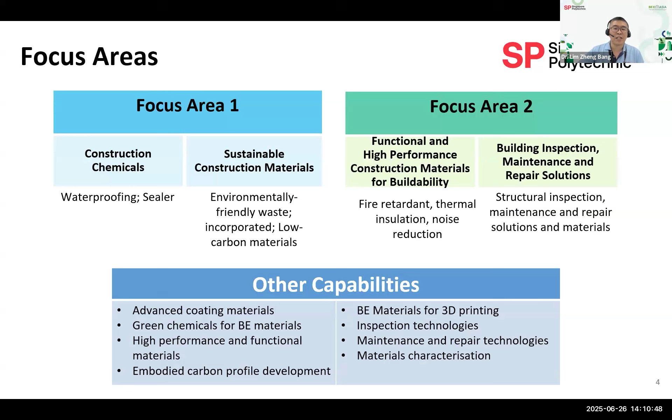Now, how do we engage with industry? There are different modes of engaging. For example, it's very easy to come out with some preliminary proof of concept studies, and then we scope our understanding of your problem statement, scope the work, and achieve the delivery milestones. SP can also assist the company to get funding from government.

Therefore, we move on to number 4, and do a lot of R&D, focusing more on downstream applied R&D, before we can transfer and commercialize to industry for use. Last but not least, this might involve some quick trial runs to test out existing technology and do a comparison study to conventional solutions as well.

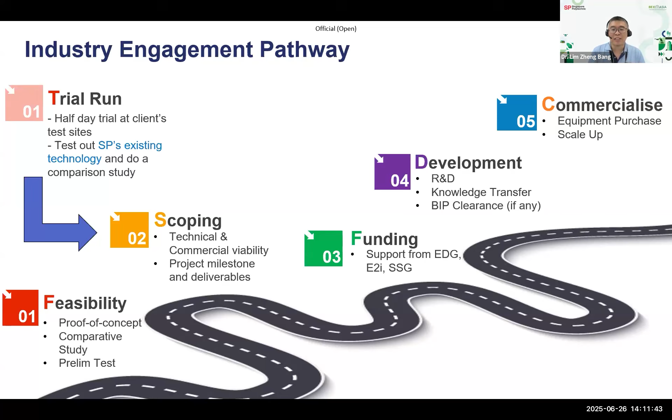This is how we engage industry, hoping more and more companies, local and overseas, come to work with us to try out their problem statements as well. Now, just to share some background about the centers.

I'll show you some examples of how we can use construction chemicals to achieve sustainability. For example, using bituminous coating, which is room temperature bituminous coating for waterproofing. Currently, contractors have to melt the bitumen at very high temperatures using a welding torch and LPG gas before laying the waterproofing membrane at the rooftop. This process involves a lot of harmful VOCs, smoke, and smell.

There might be alternative products available overseas, but they're expensive. Therefore, SP came out with a flowable, room temperature, fast-drying coating solution, like a glue, that can be applied at room temperature without the use of a primer. This is compatible with the lowest grade of bitumen, keeping the solution affordable, while still fulfilling the local standard to meet required performance.

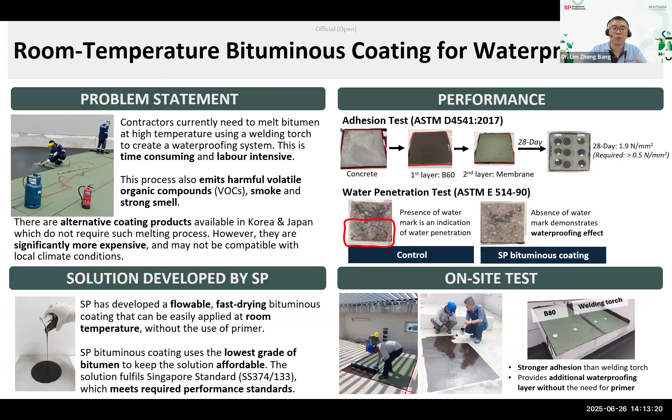We've done a lot of serious, critical testing, and worked with the company to do a trial run, proving it has stronger adhesion than the conventional welding torch method, and provides additional waterproofing layers without needing a primer. This overall process helps the industry become more sustainable, being worker-friendly and environment-friendly since we no longer need the high-temperature process.

The second example: conventional contractors have to use mechanical grinding to roughen the surface before laying epoxy coating on a tile surface. However, this process is very dusty, not environment-friendly, and noisy, raising concerns for homeowners and regulators. So we came out with a more sustainable solution to tackle this whole process.

You just apply a cream over the tile surface for about 1 hour, and it provides a uniform, scratch-free surface. This is homogeneous regardless of worker skill, compared to the conventional process. As you can see, the performance shows better adhesion, and the bonding is strong, whether in dry or wet conditions, with improved skid resistance.

We've already tried this with an industry collaborator and achieved the roughening within 1 hour with improved skid resistance and adhesion to epoxy. We're definitely looking for more companies to work with to trial further and commercialize the solution.

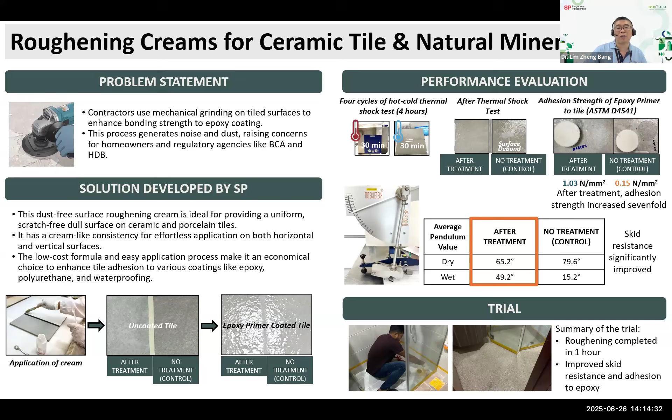Wood material is also one of the materials we've used. Conventionally, material suppliers use CCA, chromated copper arsenic, to protect wood from termites. This is not sustainable; in fact, CCA is carcinogenic and already banned in the US. So how can we help the local industry come out with a CCA alternative?

At SP, we came out with different formulations applicable to outdoor wood, in this case Malaysian Chengal, to protect against termites. We incorporate the CCA alternative inside the varnish, or even as a standalone liquid solution, to treat the termite-affected woods. We improved the formulation by changing different effective ingredients so it can withstand the Singapore environment conditions like UV and humidity.

Conventionally, the CCA process, as you can see from the picture on the right-hand side, requires impregnation at very high pressure, which might not be suitable for a multi-story building. Therefore, I think this process can also help redesign the whole process the industry is using to be more sustainable.

So we conducted a trial run over 2 months outdoors, and it's proven effective for termite prevention. We have commercialized it to local companies, and we're looking for more companies to do a trial and adoption as well.

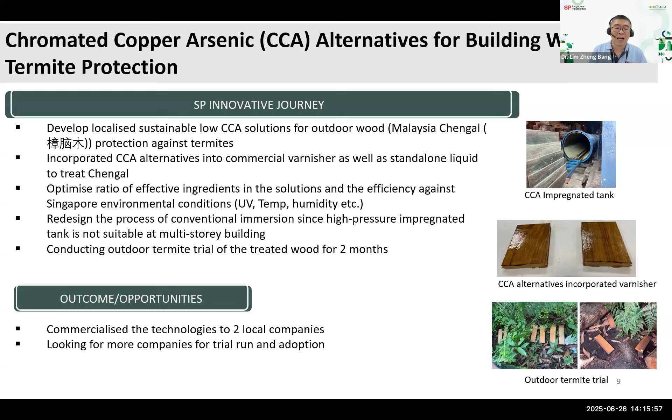The last of the chemicals we're covering regarding sustainability is the nanoglass coating for heat blocking. As you're aware, Singapore has a very hot environment, and this coating can be applied on the interior glass surface, which prevents solar heat from entering the buildings. Based on the results, internal reflection can reduce temperature by close to 10 degrees Celsius, and it can be applied to different shapes or profiles of glass. It's also very thin, about 50 microns.

We have proven this through a study together with BCA Skylab, and it can reduce thermal energy consumption by overall 9%, and achieve other functions like a 33% reduction in daylight glare. So I think this is also one of the technologies we're thinking to promote to the local industry for use in buildings. As you can see from the picture, it's very transparent. On the left is without the coating, and the right-hand side at BCA Skylab is with the coating. Achieving this result raises our confidence in bringing this technology to the market.

So I've covered some projects in terms of sustainability using chemicals as an angle. Next, I'll cover projects using materials, especially waste and low carbon materials that we try to achieve. The first project uses processed plastic waste in asphalt for better durability.

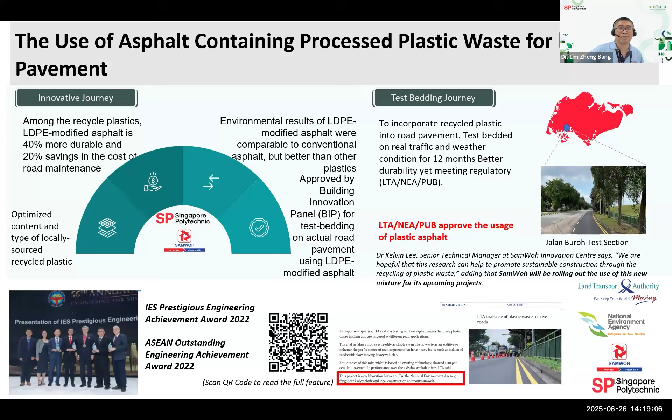The second example uses graphite, which, as you know, comes from lithium batteries. After the battery is recycled, the graphite becomes waste already. Instead of burning it and dumping it into a landfill, we try to repurpose it, giving a second life to this spent graphite. Our objective is to cut down the reliance on traditional cement, which Singapore has to import, contributing to carbon emissions.

So we try to use spent graphite as a cement alternative by implementing a very good, efficient pre-treatment method to purify these raw materials. Then we optimize and design this called blended mix and trial it. As you can see, the achievement is on par with the conventional cement mix, and it's in compliance with the US EPA 1311 TCLP level.

We also conducted external testing at the industry side, which showed that it has a very low water absorption value and a very smooth finish as well. I think this is very easy to conduct compared to conventional cement mix, and it gives us less crack formation as well.

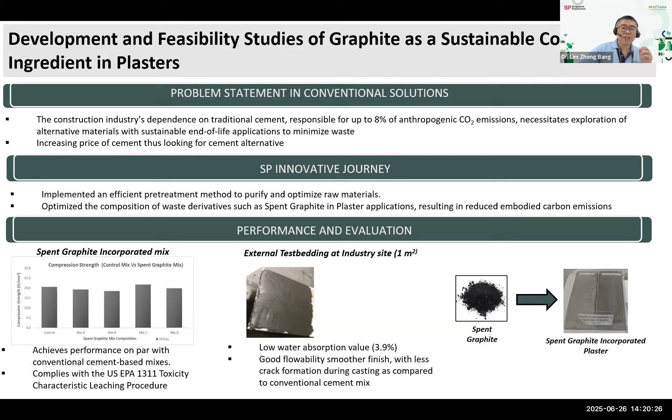Now, similar logic, but instead of spent graphite, we're using biochar. It's not new, biochar has been heavily used in agriculture applications. However, we try to transfer it to use as a cement substitution in mortar, optimizing the whole cement matrix. As you can see, the overall physical properties of the biochar are compatible with the control mix, and we think it can be used with improvement of performance as well.

Chemical leaching is also fulfilled. Some results show that the biochar derivative cement is able to absorb more CO2 compared to control. This potentially not only cuts down carbon emissions for the whole material, but also becomes a carbon sequestration property. This project was also interviewed and voted on by Zaobao.

We have already conducted and completed all the lab work and accreditation testing, and we're currently in the process of commercializing our biochar mortar formulation to collaborators. We want to expand the scope of the work, not just mortar but maybe concrete as well, and we welcome RMC, precast, or end users to think about how to work with us to trial together.

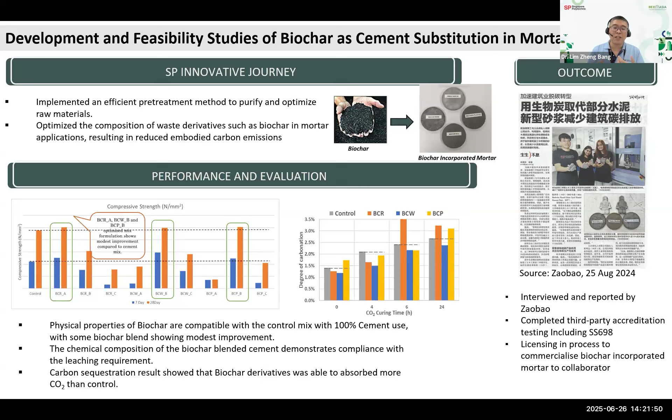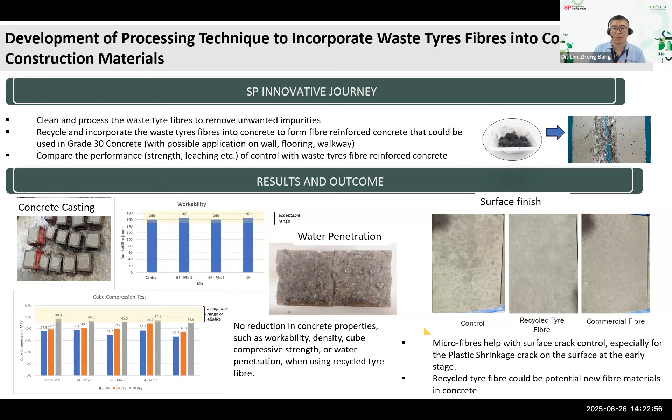I've just finished all these introductions of the projects. I'd really appreciate if you have more time and are interested, we can connect and reach out to do more collaboration on projects, and I'll share our website with you. You can scan even the LinkedIn for the latest news and updates on our progress as well. In this case, I will wrap up my introduction.

Thank you. Thank you, Dr. Lim, that was interesting, especially the tires one. I was reading that Kuwait has one of the largest tire graveyards in the world, so maybe that's really ready feedstock for that. Now maybe I invite the next one, Dr. Li, to share with us his presentation. And thank you to Dr. Lim.

Okay, good afternoon everyone. I'm Xiao Dong, manager of the COI BEAM. It is my pleasure to present our projects to you. Following Dr. Lim's introduction, I'll be sharing three additional projects related to sustainable functional construction materials.

So first, industrial ashes and waste glass are turned into silica aerogel, which is a lightweight material with thermal and acoustic insulation properties. Second, glass recovered from end-of-life photovoltaic modules or solar panels is converted into foam glass insulation panels. And finally, waste autoclaved aerated concrete is upcycled into supplementary cementitious material.

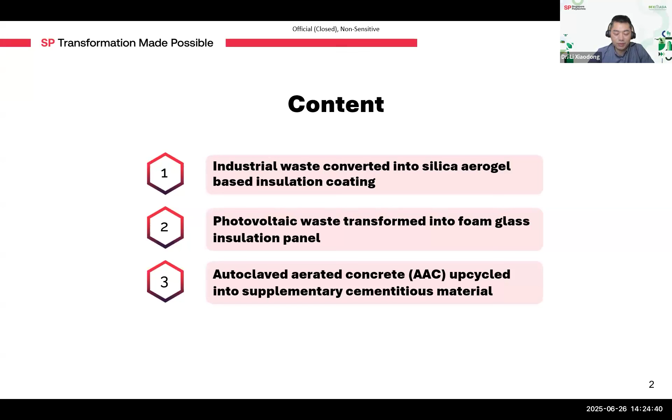So let me begin with our first project, which focuses on an exciting transformation, turning industrial waste into high-performance insulation coatings made with aerogel.

As urbanization and industrial activity accelerate globally, the volume of solid waste is rising rapidly. One major response to this has been the growth of waste-to-energy incineration, a process that not only helps manage waste but also generates electricity. Reflecting this trend, the global incinerator market grew from around 18 billion US dollars in 2023 and is projected to reach 23 billion US dollars by 2033. But this comes at a cost - incineration produces a large volume of ash as a byproduct.

While some of the ash is relatively safer and easier to recycle or landfill, a large portion of the ash poses a greater challenge. It contains higher concentrations of heavy metals, salts, and other contaminants, requiring special handling and treatment. This presents an urgent need for green, sustainable technologies that can manage these byproducts in a way that is both safe and value-adding.

In Singapore, waste management is a national priority. The government aims to reduce the amount of waste sent to Semakau landfill by 30% by 2030 as part of its zero waste master plan. In 2023, Singapore still generated about 6.86 million tons of solid waste, a slight decline compared to previous years, but still a significant volume.

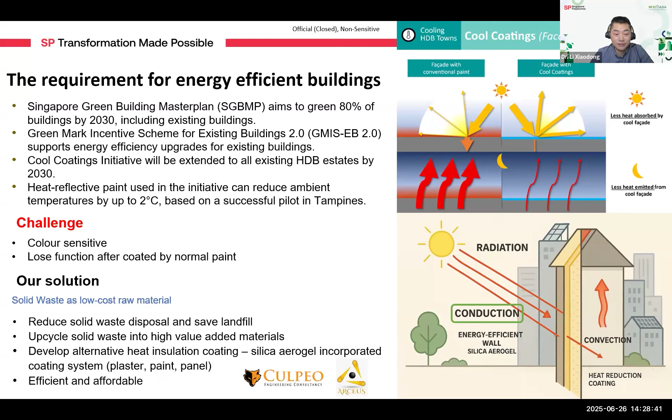With support from the Urban Solutions and Sustainability Innovation and Enterprise Office, we successfully licensed this technology to Culpeo and spun off a company called Arceus Resources to scale the silica aerogel production. Silica aerogel is a remarkable material known for its ultra-low thermal conductivity, lightweight structure, and excellent fire and sound resistance. It's widely used in high-tech sectors like oil and gas, aerospace, and military insulation systems.

But there is a problem: it's traditionally too expensive for widespread use in the building industry. So we tackled this challenge head-on by using waste material as raw feedstock, including different kinds of ashes such as wood chip ash, coal ash, municipal waste ash, and waste glass, and optimizing the manufacturing process to reduce energy consumption and improve yield. As a result, we reduced the production cost by up to 50%.

We achieved a thermal conductivity as low as 0.02 watt per meter Kelvin, a level comparable with top-tier insulation materials, and produced aerogel with a density as low as 0.05 kilogram per liter, making it one of the lightest insulation materials available. My colleague Dr. Han will introduce more details later.

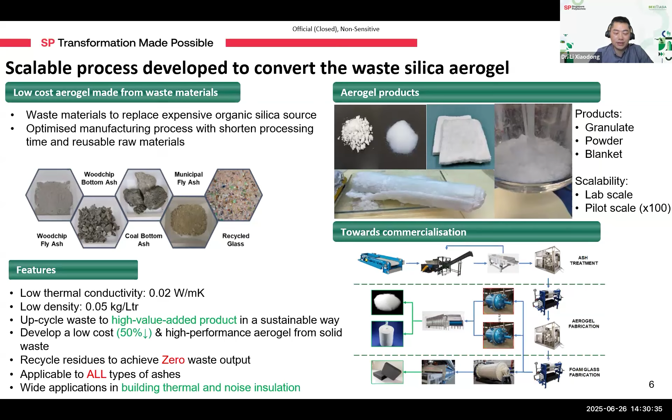Our aerogel can be processed into multiple formats: blankets for building envelope insulation, and granulates or powders used as additives for different coatings. We have proven scalability by moving from beaker-scale laboratory synthesis to about a 10-liter pilot batch process, achieving a 100-fold scale up, which paves the way for full-scale industry production. We also designed the full industry production line.

So how does it perform? In one simulation test, we coated a hollow concrete box with the aerogel-infused coating, placed it in a 40°C oven, and used thermocouples to monitor the temperature through the material. With about 20% aerogel content, we observed a temperature drop of 3.3°C, a significant boost in insulation performance. Aerogel's high porosity also makes it a natural sound insulator, with sound reduction of 19.6 decibels, ideal for noisy urban environments.

Beyond the lab, we have also demonstrated its effectiveness in a real-world setting. At the SP Graduate Guild building, we recorded a surface temperature reduction of up to 15 degrees Celsius after applying our aerogel-based coating. Please note this refers to the surface of the coating, not the indoor air temperature, but it clearly illustrates the material's heat blocking capabilities.

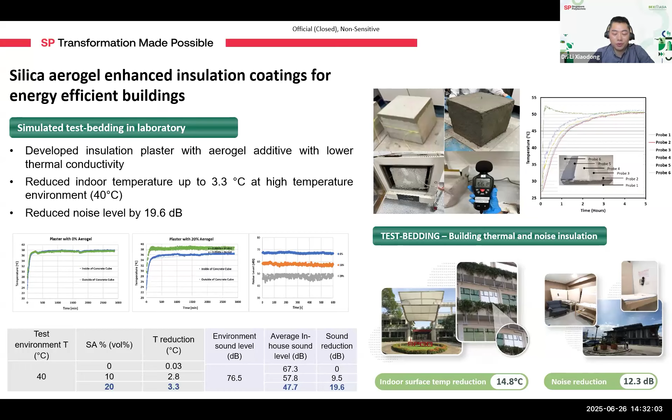And at the JTC Jurong Innovation District Gallery, we achieved a sound reduction of up to 12 decibels. So through this project, we have shown how an industry byproduct, incineration ash, can be turned into a game-changing building material.

Our second project focused on transforming solar panel waste, specifically the waste glass, into high-performance foam glass insulation panels. Solar energy is one of the cleanest and most sustainable energy sources globally, and over the years solar panel installations have grown rapidly. By the end of this year, the global installed capacity is expected to reach 2 terawatts. This is great news for clean energy, but it also brings a growing challenge.

What do we do with all the end-of-life solar panels? Solar panels typically last 20 to 25 years, and after that they need to be retired or replaced. In Singapore, we expect to generate around 5,000 tons of PV waste, mostly due to early upgrades at only half of their lifetime for better performance and profitability.

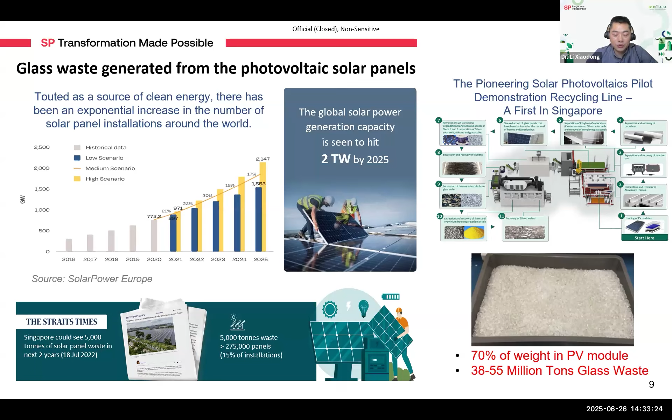To tackle this, we have developed the country's first PV recycling plant. But here's the issue: glass makes up about 70% of a solar panel's weight, translating to about 38 to 55 million tons of glass that need to be safely managed. Looking at the element content of the PV glass, which like other glass primarily consists of silicon and calcium, with additional metals such as chromium and titanium, it is important to find a safe recycling solution for it.

Our solution is to transform the glass waste into a foam glass panel, a lightweight, porous, and robust material with excellent thermal insulation properties. We have successfully converted the waste glass into foam glass and focused on optimizing its performance.

The insulation quality of the foam glass depends heavily on its composition and processing conditions. We tested different foam agents and carefully tuned the manufacturing parameters. The key evaluation factors are pore structure and size, pore uniformity, and material density. Too small pores don't insulate well, and too large pores weaken the structure. Uniform pores are ideal for strength and performance.

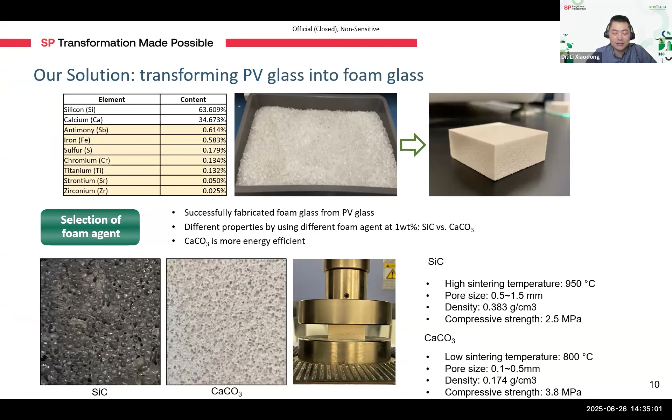For example, when using silicon carbide as the foam agent, we observed large and uneven pores, making the foam glass brittle. On the other hand, calcium carbonate produced uniform pores and stronger samples. Plus, it requires 150 degrees Celsius less energy during processing, making it a greener choice.

We further optimized the percentage of calcium carbonate. We found that increasing the content enlarged the pores and reduced the density, but it also weakened the structure. So we identified 1% calcium carbonate as striking the best balance between insulation performance and mechanical integrity.

The mixing time also plays a crucial role. Longer mixing leads to better powder dispersion. Our results show that after 6 hours, the density stabilizes, indicating optimal uniformity.

One drawback of the low-density foam glass is reduced compressive strength. To tackle this, we introduced fly ash into the formulation, not only to improve the strength, but also as another opportunity to recycle industrial byproducts and reduce waste.

The outcomes were promising. Adding fly ash improved the compressive strength of the foam glass and slightly increased the density, which can be tuned depending on the performance needs. It also diverts fly ash from landfills, creating a dual recycling value.

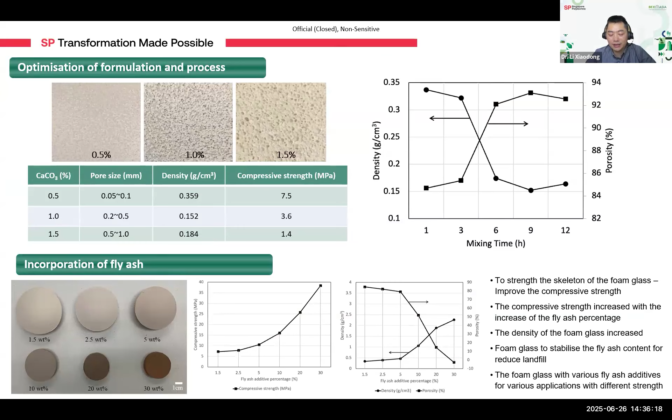While developing these materials, we are also mindful of environmental safety, especially under conditions like rain or moisture exposure. We wanted to ensure the heavy metals in the fly ash won't leach into the environment. So we conducted a standardized leaching test following the guidelines from Singapore's National Environment Agency.

What we did was crush the foam glass samples, immerse them in deionized water, and then rotate the mixture for 24 hours before analyzing it using ICP-OES.

The results are clear: only the sample with 30% fly ash exceeded the allowable limits. For fly ash content up to 20%, all the samples passed the leaching safety standards except for lead. By pretreating the ash to remove the lead, it becomes safe to use, and the overall process becomes much simpler.

So this project transforms end-of-life solar panel glass and fly ash into safe and high-performance foam glass insulation panels, offering a scalable and sustainable solution that supports circular economy goals and enhances building energy efficiency.

Now let's move on to our third project, which explores how we can upcycle autoclaved aerated concrete waste into useful construction materials, specifically as a supplementary cementitious material and a partial or full replacement for natural sand in mortar or concrete mix.

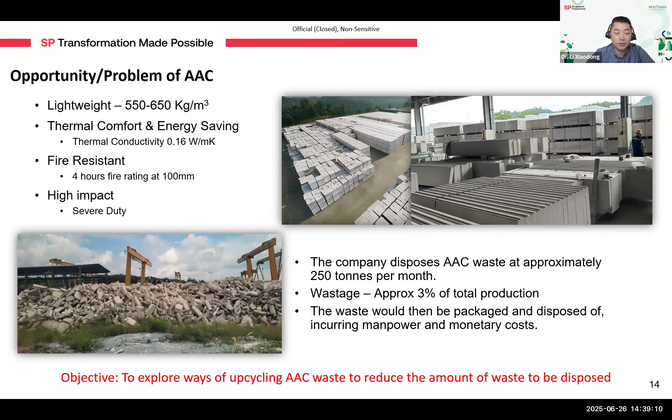This not only burdens the environment but also adds considerable cost in manpower, handling, and disposal fees. The objective is to find effective ways to upcycle the AAC waste and minimize the amount sent for disposal. Our project aims to repurpose this AAC waste by crushing it into a fine powder and using it to partially replace natural sand in cement mortar and concrete. Given its porous structure, AAC waste also contributes to improved thermal insulation in the final product.

We started by conducting a series of workability tests, including perpendicular diameter measurement and slump testing. These tests help assess how easy the modified mix is to work with on site, whether it can be mixed, poured, and finished without major adjustments. The results show that the substitution had only a minimum impact on workability, making it a practical solution for real-world applications. We then evaluated the mechanical and physical performance of the modified cement mortar.

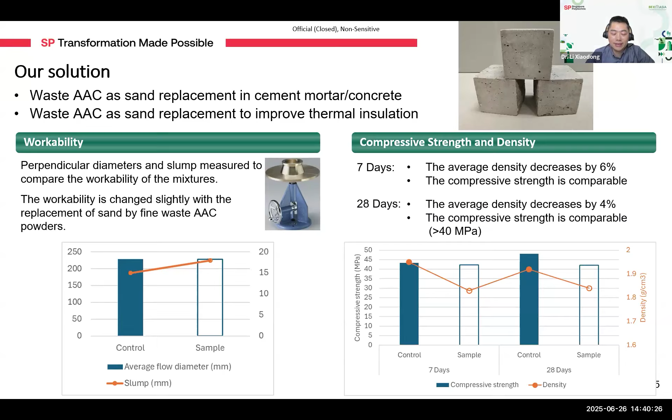We found the density decreased by about 6% at 7 days and 4% at 28 days, respectively, due to the inclusion of the lightweight AAC powder. Despite that, the compressive strength remained high, exceeding 40 megapascals, which is comparable to the control mix made with natural sand. We also analyzed the material's water absorption and void ratio, given the use of the porous material.

The water absorption was calculated as the difference between the surface saturated dry density and the natural density, divided by the natural density. Similarly, the void ratio was determined by the difference between the surface saturated dry density and the oven dry density, divided by the oven dry density.

The thermal conductivity was measured using a heat flow meter, which recorded the heat transfer from the hot end to the cold end. Both the water absorption and void ratio increased slightly, which is expected due to the porous nature of the AAC. But more importantly, the thermal conductivity of the mortar decreased by approximately 10%, indicating improved thermal insulation compared to the standard mix.

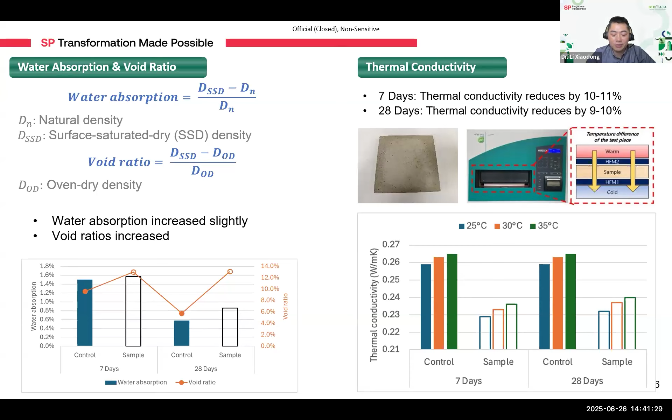To better understand the limits and flexibility of AAC usage, we also experimented with higher dosage levels with higher AAC-to-cement ratio. The water dosage was also optimized to compensate for the porous nature of the AAC, ensuring proper hydration and mix consistency.

The compressive strength and density both decreased with higher AAC content, and workability also dropped, as shown by lower flow diameter and slump values. This creates a flexibility window for users. If your priority is mechanical strength, you can use a lower dosage of AAC. If you want to maximize thermal insulation, you can go with a higher dosage, especially in applications like non-load bearing panels or energy-saving building components.

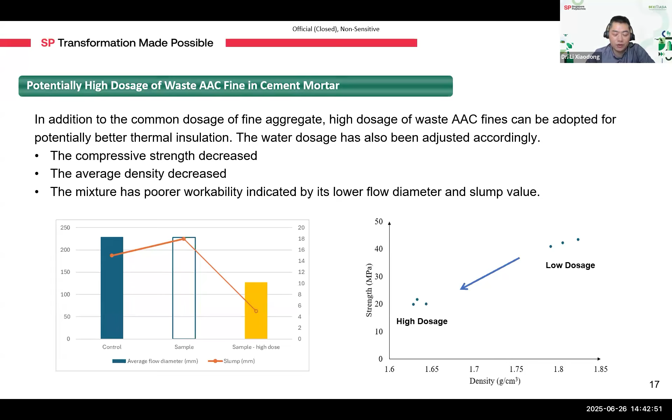In summary, these projects demonstrate how common construction waste, AAC offcuts and reject materials, can be effectively upcycled into high-performance building components. Together with our first two projects on aerogel and foam glass, this initiative reinforces our vision to transform construction and industrial waste into valuable, sustainable materials for the built environment. Thank you for your attention.

Hello everyone, good afternoon everyone. Thank you very much for attending this presentation. For the first two speakers, Dr. Lim and Dr. Li, the focus is more on detailed research. Perhaps I can brief a bit on my presentation.

I'm from the School of Architecture and the Built Environment. The purpose of my presentation here is that we try to engage industry by providing young talent.

So to do R&D through industrial project and internship, we focus on the development of silica aerogel and looking at the opportunity on how we try to upscale based on the current research that we are developing in SP.

So we're going to start with introducing an overview about Singapore Polytechnic in general and what is the education system, especially focusing on the engineering concept when we teach our young students here, so that they are able to tackle the challenges and able to support industry.

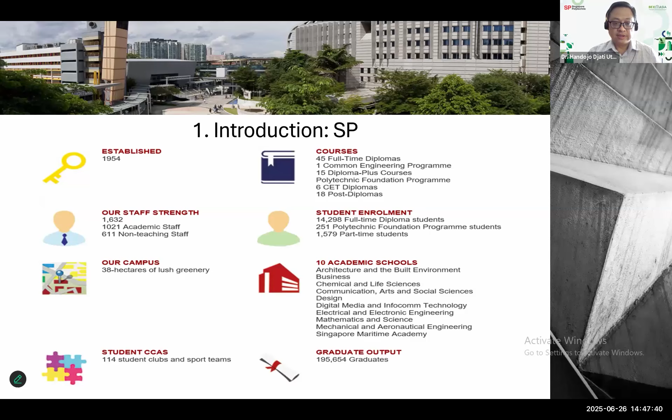So we have a graduate output about almost reaching 200,000 graduates with 114 CCA clubs. As mentioned before, this is how we train our students.

We follow a CDIO framework, which is the education framework developed by MIT. In 2009, we became the co-regional CDIO center in Asia. In 2018, we became the co-director for CDIO International Council.

And by 2019, we are able to invite 90 faculty members from 12 universities, including people from Southeast Asia and also from Korea, as well for enhancing the tertiary education program.

Civil engineering is considered one of the most established schools in training of professionals in the built environment. This has already developed since the 1950s.

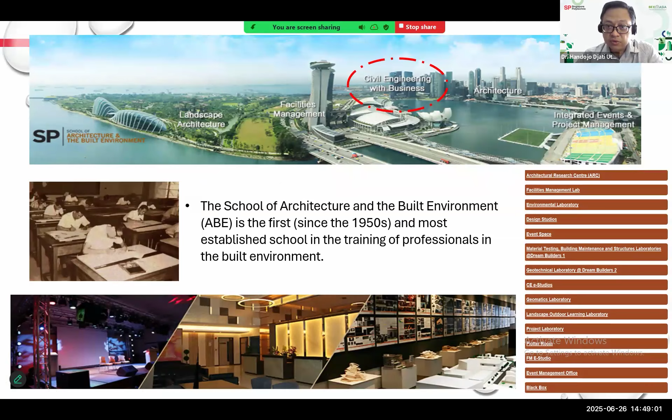So again, we focus on how we manage solid waste in Singapore. So we borrow this concept from NEA, National Environment Agency, and our focus here is practically on waste minimization and recycling, or simply the reduce, reuse, and recycle.

In land scarce Singapore, waste to energy is getting more important because this offers the best technical solution for reducing waste volume to conserve landfill space.

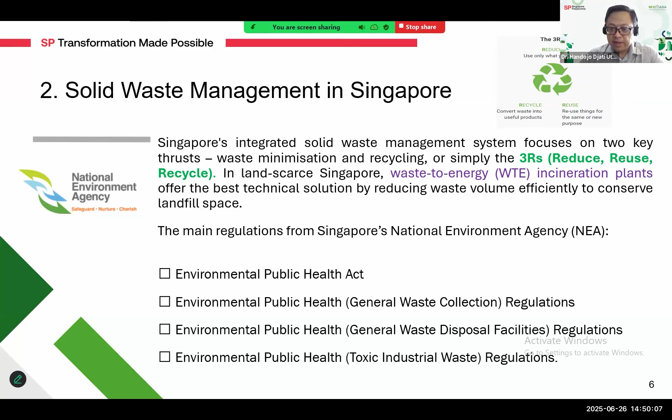And if we follow NEA, we are actually following the Environmental Public Health Act and under General Waste Collection Regulation and General Waste Disposal Facilities Regulation. And the last one is under Toxic Industrial Waste Regulation.

In Singapore, our situation, I think Dr. Li mentioned a bit, so I try to open up a bit more details here. In Singapore, we have only one dumping site, and this one was already developed in the 1970s, and Semakau landfill will run out of space by 2035.

So we need to be more resilient. So here the focus is more on climate resilience, resource resilience, and economic resilience.

So we also need to change our mindset, okay, from a linear economy, where we only take, make, and dispose, to a circular economy. So this concept is we try to reuse, recycle, and also if possible, we try to produce new resources as long as possible.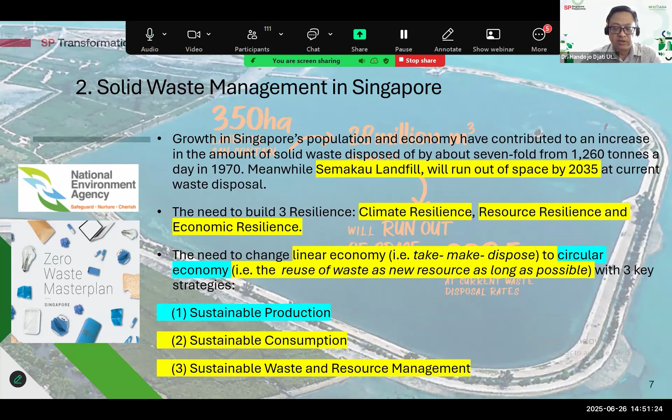And our focus here is more on sustainable production, in addition to sustainable consumption and sustainable waste and resource management. We have 3 targets based on NEA.

We try to extend Semakau landfill lifespan beyond 2035. We try to reduce the amount of waste sent to landfill per capita per day by 30% by 2030.

Meaning, so at the moment, if you have 360 grams per capita by 2018, so we try to reduce about 30%. So this will go down to 250 grams per capita per day by the 2030s.

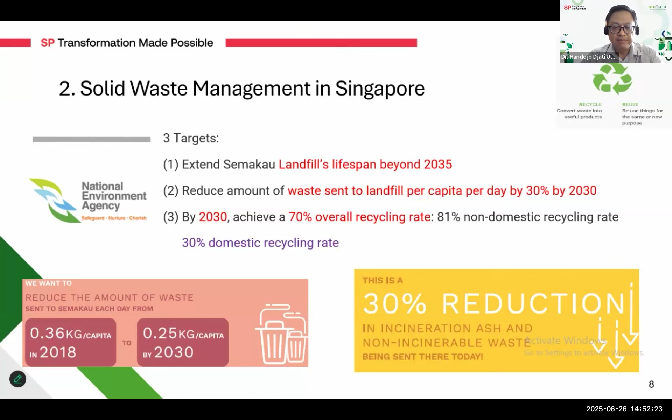So we plan to do this by improving the recycling rate, up to 70%. In detail, we can achieve this by 81% non-domestic recycling rate and 30% domestic recycling rate.

Looking a bit more in detail, if we focus on 70% on the left picture, from commercial, industry, retail, residential, consumer, the waste generated at the moment is reaching up to 20,000 tons per day.

Currently only about 60% of the waste is able to be recycled. With the incineration process, we're able to prolong Semakau a bit, because about 7,000 tons per day, or 38% of the waste generated, is incinerated. By burning it, at the end only maybe about 20% now can be dumped in landfill. So we are able to prolong it a bit, but this is still not enough.

If you look at the right picture, we need green technology to process the waste more efficiently, because at the moment, with the burning process, fly ash can be used by many people in the building industry, but the bottom ash still has room for development. This shows the area of Singapore that's almost full, so we urgently need to process it to make new material. We may have sustainable production or new transformed material, in the form of silica aerogel at the moment.

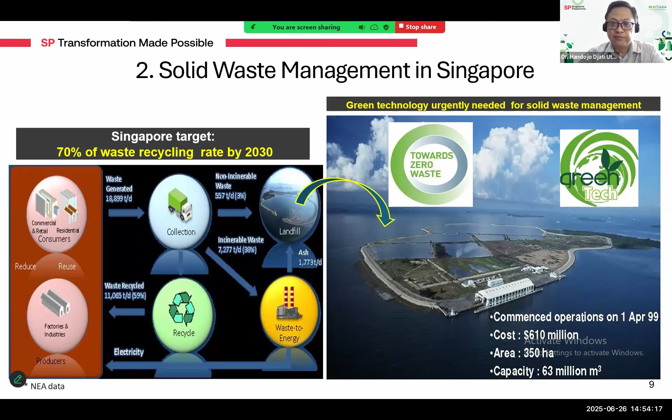As mentioned before, we are transforming our economy from a linear economy to a circular economy. Circular economy is now becoming an economic imperative more than ever, compounded with many pressing factors, such as game-changing shifts. We try to reduce by design while still meeting the functionality, but also repurpose, recycle, refurbish, reduce, and reuse more and more. This world-changing phenomenon has changed the industrial landscape.

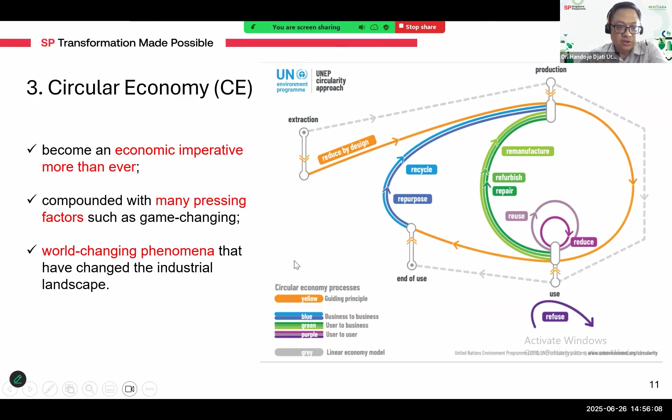In this presentation, we try to explore the green journey that Singapore Polytechnic has taken, from concept, design, to development. For the Green Master Plan, we focus more on green technology, particularly in upscaling and recycling IBA, or incinerated bottom ash.

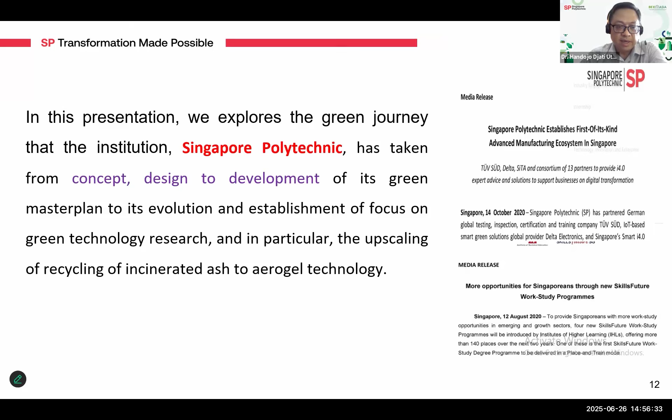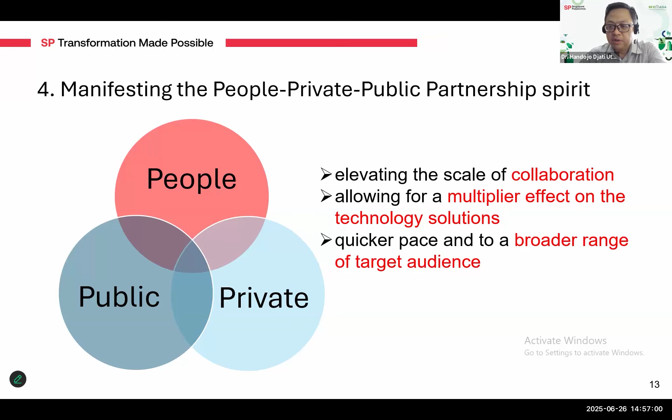This is how we try to engage people, private and public. We try to elevate the scale of collaboration, allowing more multiplier effect on the technology solution, with quicker pace and a broader range of target audience. How do we do it?

Dr. Lim mentioned a bit from the industry point of view. From school, we look at the very basic at the bottom. In the first scale, we have seed stage, where ABE and AMTC work together. We have some basic laboratory tests and practical projects, done internally. We have strong collaboration with our Center of Innovation, especially AMTC.

At the growing stage, we have industrial collaboration, more partnership, and maybe longer internships internally and externally. We also have industrial sponsorship to create more solution-minded projects and FYPs.

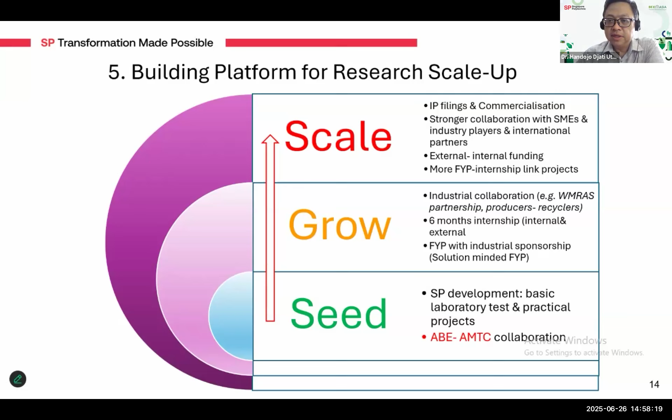At the last stage, we plan to have more IP filing, more commercialization, stronger collaboration with SMEs and industrial players, and also international partners. We expect more external and internal funding, and more FYP and internship linked projects. This is the model we mentioned.

Looking at the aerogel project, the objective is how we improve the low recycling rate of ash, but also find a useful alternative for aerogel materials such as thermal insulating material, acoustic barriers, absorbent, catalytic support, and supercapacitor, with the aim of prolonging the lifespan of the Semakau landfill.

Assuming we have a large company with many different activities in daily operation, under current practice, they have to incinerate and burn solid waste, then ship it to the Semakau dumping field.

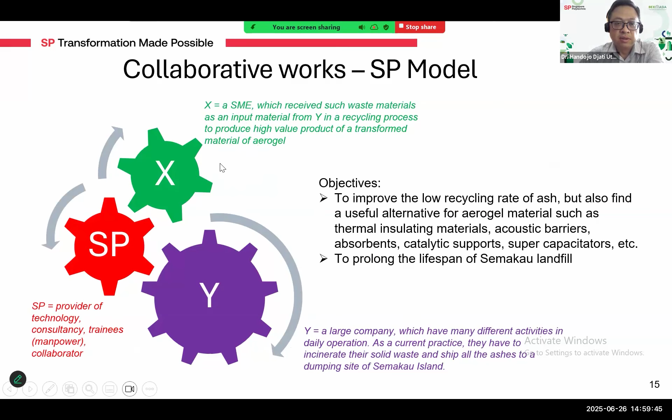SP is becoming a provider of technology, and as a consultant, we're also able to provide trainees and manpower for collaboration. As SME, our role here is to receive material as input from company Y, and we do the recycling process, upgrade, and transform it into the commercial product of aerogel.

What makes aerogel unique as a building material? As mentioned by Dr. Lee before, this is considered the world's lightest solid material, composed of about 90% air by volume and 10% silica nanoparticles, in the form of an amorphous cross-linked three-dimensional silica network.

Because of the high porosity, silica aerogel has unique characteristics. We have high specific surface area, up to 1,200 square meters per gram. We have low refractive index, 1 to 1.08, and low density, which can go up to a maximum of only 100 kilograms per cubic meter.

So more likely this floats in water, depending on the porosity of the aerogel. We have ultra-low dielectric constant, 1 to 2, and low thermal conductivity, up to maybe 0.02 watts per meter per kelvin.

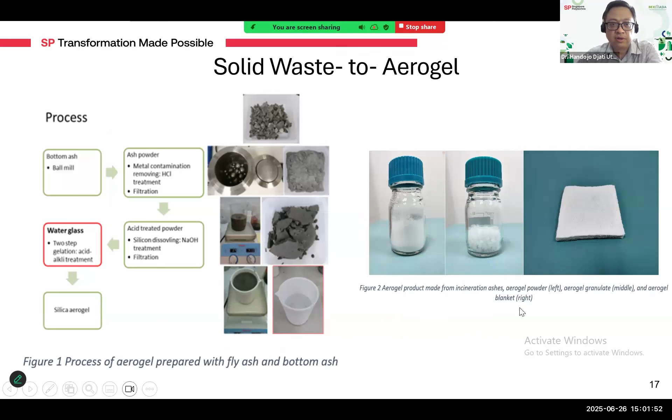Some case studies: internally, we are able to install it as a thermal insulator. This has already been installed in our alumni campus at SPGG.

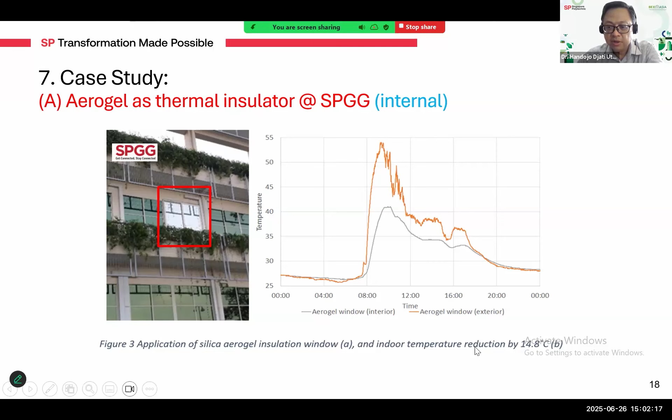As mentioned by Dr. Lee before, at about 11 o'clock you can see here indoor and outdoor, we have a reduction of temperature up to 15 degrees Celsius. Another application with support from our young talent, in JTC we have noise mitigation testing at Tengah Air Base.

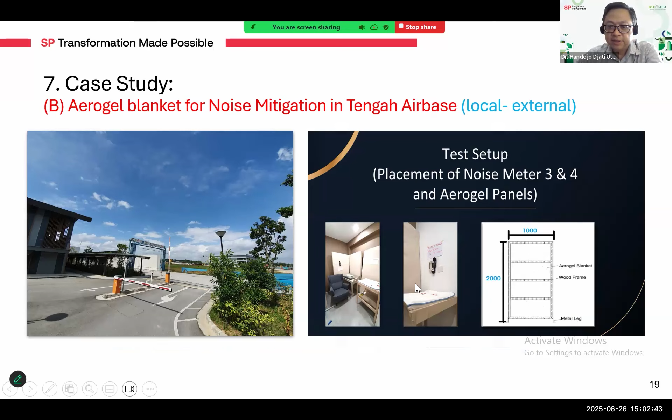The test setup includes a noise meter and a silica aerogel panel blanket. As you can see, there's a room provided, and we installed it with 2 meter reading points.

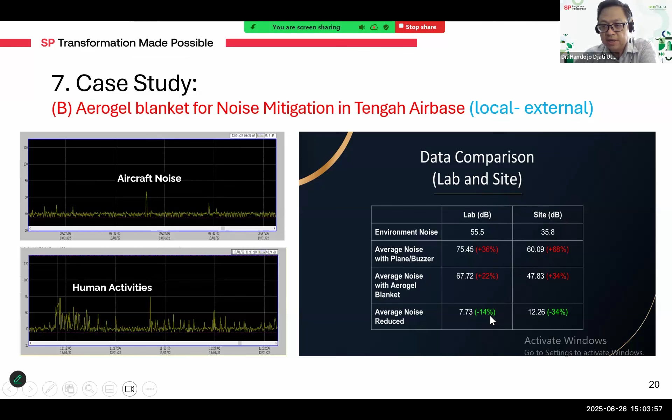Based on the data comparison, our silica material is currently able to reduce noise by about 14%, based on lab testing. On site, we are able to reduce it by about 12 decibels.

As mentioned, we also present this internationally. Recently we presented it in Turkey, at the International Civil Engineering and Architecture Conference.

In fact, our material is not only aerogel. The aerogel residue and aerogel aggregate also have low density, meaning this is essentially a half-cooked material that can be utilized without needing to be processed fully into aerogel. This gives us the opportunity for low processing cost, and it can be used as a concrete mix.

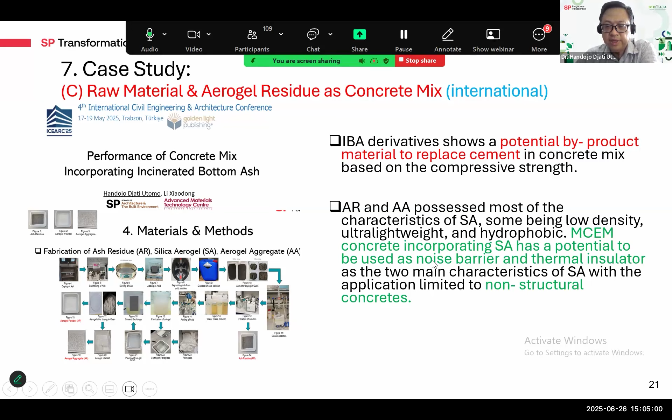Currently we are still proposing this as a noise barrier and thermal insulator, so practically the application is for non-structural concretes.

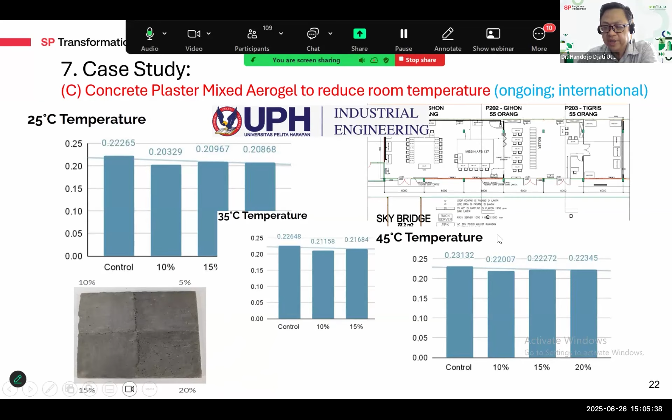On the left side we have hot blowing air, and on the right side we have sun penetration. The room gets so hot that even using aircon doesn't help at all, so we try installing the aerogel blanket to see how it can reduce the room temperature.

In summary, aerogel is a potentially available material in our lab, and we plan to use it for the built environment industry.

Recently, we had an interview with Straits Times, and perhaps we can watch a little bit of the short video clip on how silica aerogel is becoming a treasure.

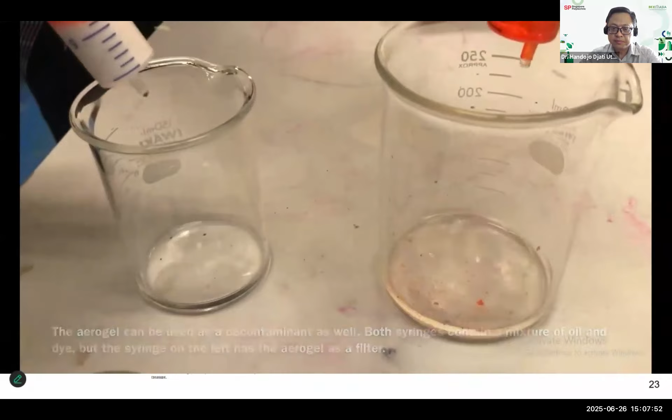Thank you very much, Dr. Han, that was very interesting - the use of aerogel to block out the sound of the alarm clock. If I were to do that, I'll never wake up in time for work.

All right, and last but not least, I invite Dr. Tao to share his slides. Many thanks, Suhami, for your kind introduction. Good afternoon everyone, my name is Tao Nengfu. I'm from School of Architecture and Built Environment, Singapore Polytechnic.

In my presentation today, I will be sharing our innovative approach to utilizing wood chips and sawdust for sustainable construction applications. This work is the outcome of a collaborative consultancy project between Singapore Poly and Singuantech Private Limited, supported by the SSG Mentorship Support Grant.

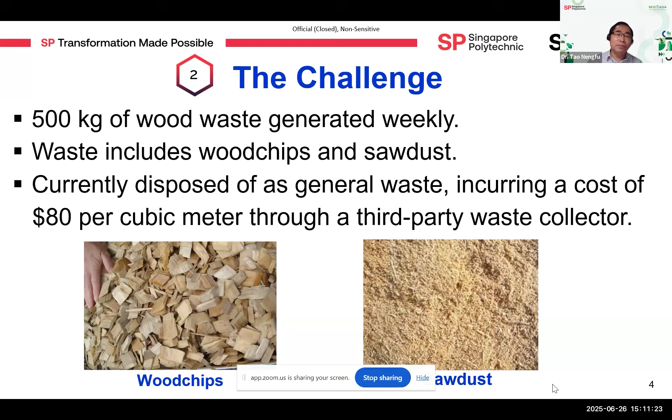To address the challenge faced by Singuantech, a collaborative consultancy project supported by MSG funding was proposed. The objective of the project is to develop sustainable solutions for wood waste and to convert the wood waste into wood cement composites and particle boards. This is to promote circular economy practice in construction.

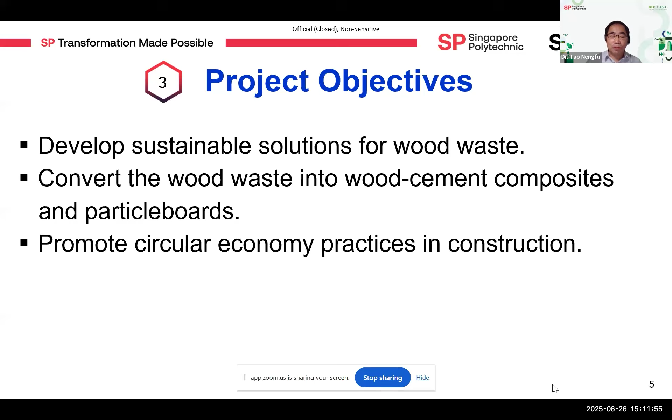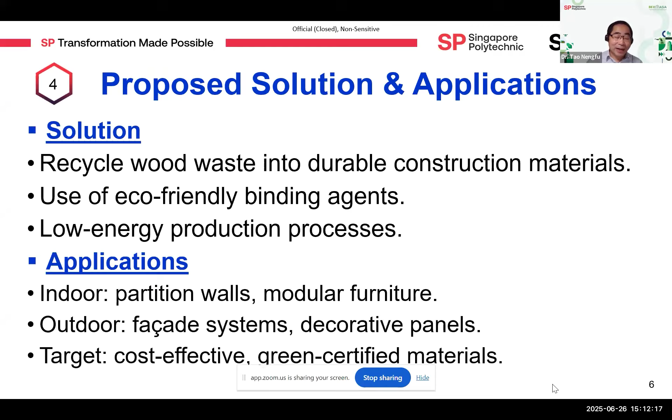We propose recycling wood waste into durable materials like wood-based cement composites, particle boards, partition walls, and decorative panels. Using eco-friendly binders and low energy methods, these products target both indoor and outdoor applications. We sourced and pre-processed materials, performed mixed design trials, and conducted mechanical and thermal performance tests to develop the best formulation.

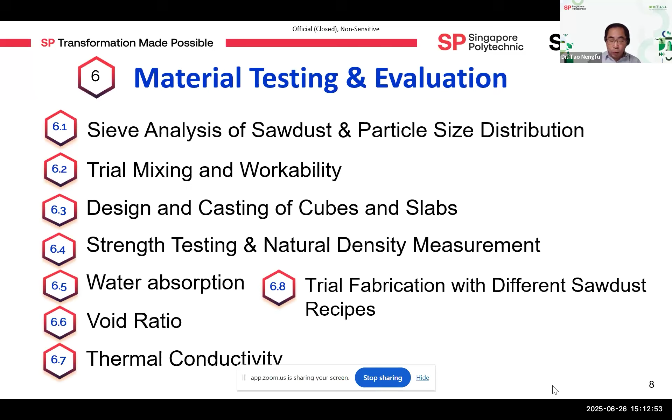Our testing included sieve analysis, mixing trials, casting specimens, and evaluating properties like strength, density, water absorption, void ratio, and thermal conductivity. As particle size affects strength, workability, and water absorption, we analyzed sawdust using different sieves. The sieve sizes used ranged from 4 mm to 150 µm. Fine particles increase water demand, while coarse particles reduce the homogeneity.

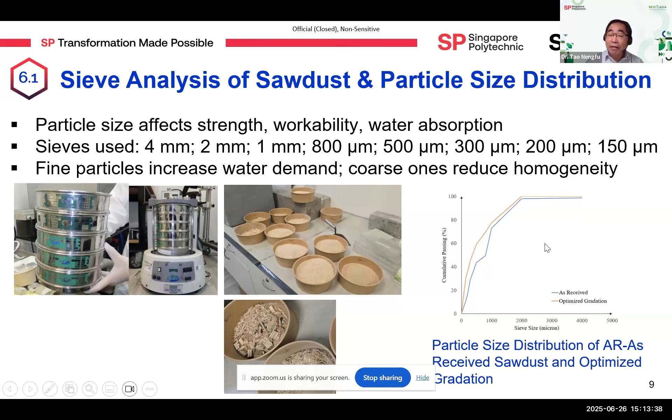The graph shows the particle distribution of AR, which stands for as-received sawdust, and OG, which stands for optimized gradation. From the graph, we can see that OG has more fines and a smoother distribution curve than AR.

Trial mixing has been conducted after the sieve analysis. The mixture contains type 1 OPC, silica sand, sawdust, and water. The qualitative description of the fresh status, as shown in this table for each trial mixture, was used as guidance for adjustment of the mixture design in order to achieve the best quality of material.

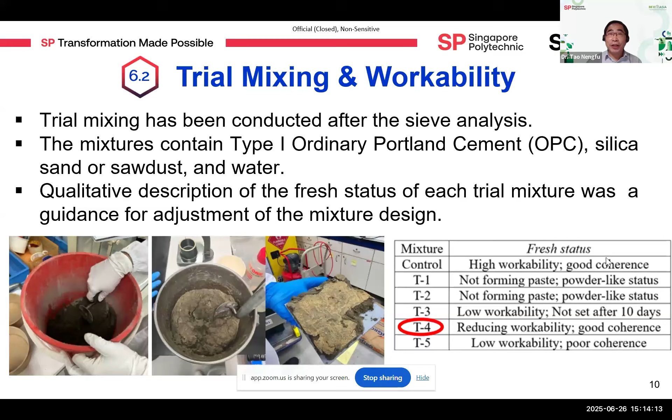Workability of the developed mixture was evaluated by flow table test.

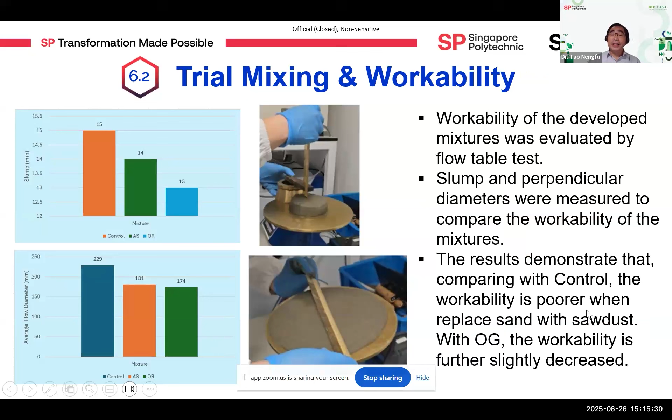The slump and perpendicular diameter were measured to compare the workability of the mixture. The results shown in the bar chart demonstrate that, comparing with the standard control, the workability is poorer when replacing sand with sawdust. With OG, the workability is further slightly decreased.

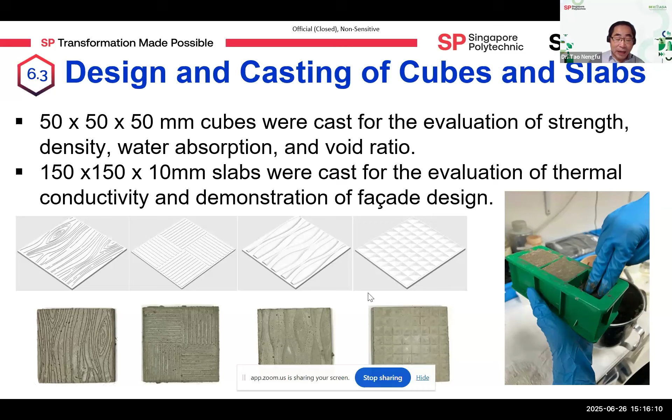50 by 50 by 50 mm cubes using this mold were cast for evaluation of strength, density, water absorption, and void ratio. 150 by 150 slabs were cast for evaluation of thermal conductivity and demonstration of facade design. From the photo here, you can see the slabs have good surface quality and demonstrate the design details. Three cubes of size 50 by 50 by 50 mm were cast for each mixture to evaluate strength, density, water absorption, and void ratio.

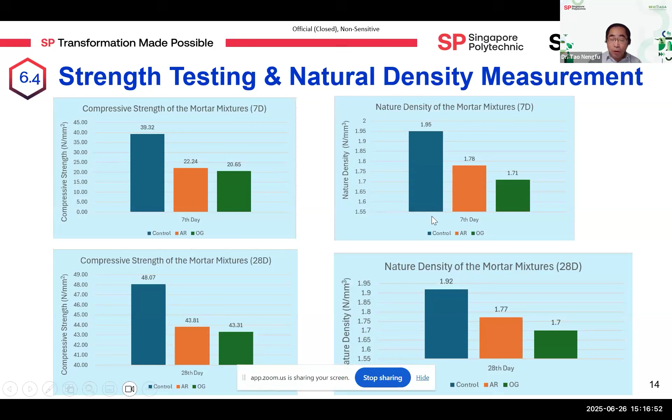Both 7-day and 28-day compressive strengths and natural densities were measured for the control mortar and the mortars containing sawdust, namely AR and OG. The bar charts on this slide present the test results for compressive strength and natural density of mortar mixtures at 7-day and 28-day curing periods.

From the previous slide's bar charts, we can draw a few key points. At 7 days, the average density decreased by 9% in AR and 12% in OG, while compressive strength decreased by 43% in AR and 47% in OG. At 28 days, the average density decreased by 8% in AR and 11% in OG, while compressive strength decreased by 9% in AR and 10% in OG.

The difference in 7-day and 28-day compressive strengths suggests delayed cement hydration and late strength development with sawdust. Overall, we observe density reduction of 8 to 12% and initial strength reduction of up to 47%, but significant strength gains were noted at 28 days.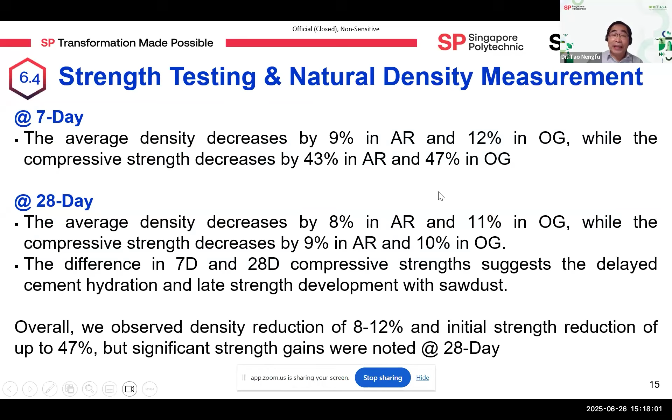Water absorption of the developed mortar mixtures was measured by comparing the natural density and the surface saturated dry density. Water absorption increased with time in sawdust-based mixes, especially in OG. This indicates delayed water uptake and hydration behavior. In contrast to the control mixture, water absorption was initially lower but higher at 28 days when sand is replaced by sawdust. Especially OG has a higher water absorption value than AR.

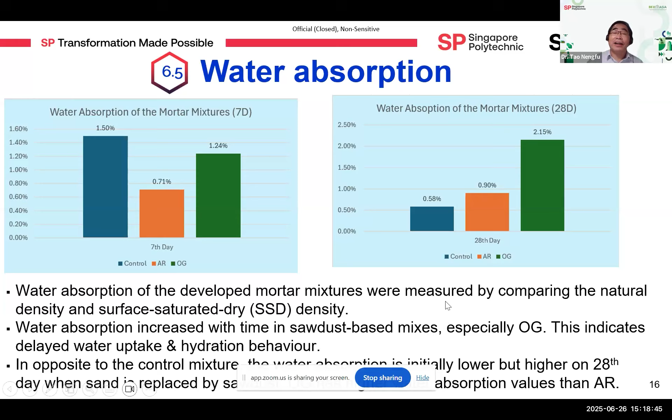The thermal conductivity of the developed mortar mixtures was measured at 25, 30, and 35 degrees Celsius using a heat flow meter on the 7th and 28th day from casting respectively. Thermal conductivity was significantly reduced in the OG mixture, about 27% lower, indicating stronger potential for thermal insulation applications. Thermal conductivity slightly increased in AR but decreased drastically, about 27%, in OG, both at 7 days and 28 days. These two bar charts show the average thermal conductivity of mortar mixture at 7 days and 28 days respectively.

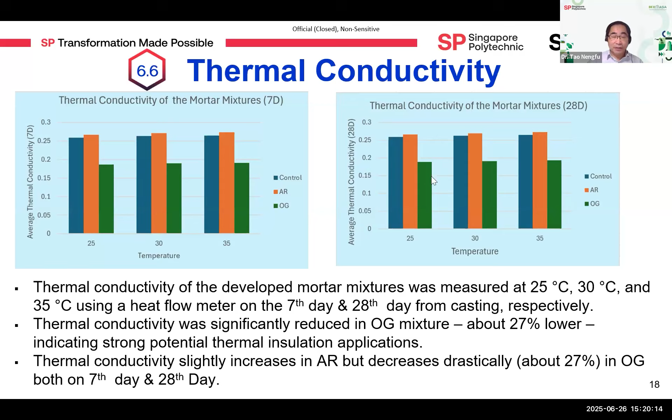As various wood chips and sawdust sizes may lead to homogeneity issues in the mixture and in turn affect the strength of the particle boards, trial mixing was conducted after sieving the as-received wood waste. The mixture contained wood chips, sawdust, resin, and additives. After filling the mixture into a 100 by 100 by 10 mm mold, it was placed in a hot press machine to compact the mixture into a particle board.

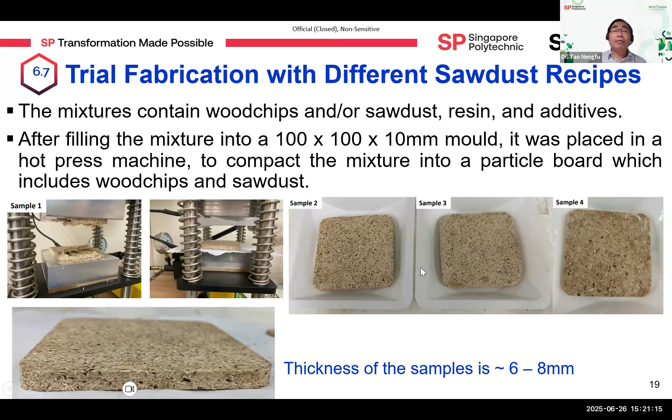We fabricated the particle board using a hot press and various sawdust recipes, achieving uniform thickness and homogeneity. You can see from the photo here samples of particle boards with different recipes. The thickness ranges from 6 to 8 millimeters.

Key findings from this project for cement mortars: sawdust reduced density and workability and delayed hydration, but strength improves by 28 days. OG is better for insulation but more porous. Replacing sand with sawdust in cement mortar is feasible, but adjusting the sawdust dosage is key.

For particle boards, a recipe for fabrication has been established after sieving the as-received wood waste. Board thickness and uniformity can be achieved. Homogeneity is critical to mechanical integrity.

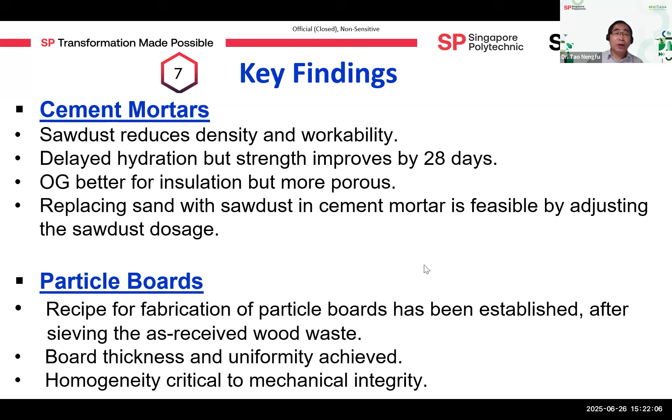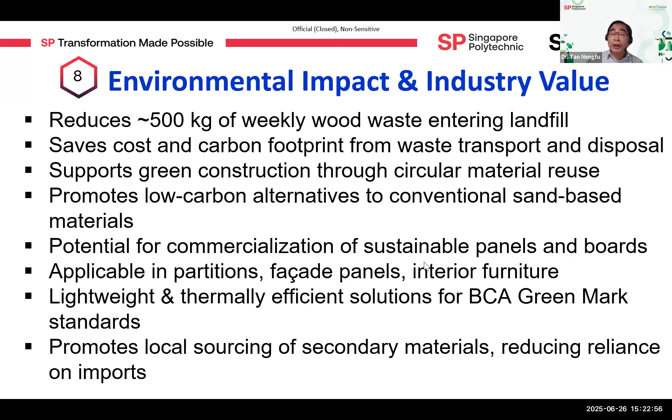This project has environmental impact and industrial value. It diverts 500 kilograms of wood waste from landfill, saving cost and carbon footprint from waste transport and disposal, and supports green construction through circular material reuse. It promotes low carbon alternatives to conventional sand-based materials, with potential for commercialization of sustainable panels and boards applicable in partitions, facade panels, and interior furniture. It provides lightweight, thermally efficient solutions for BCA Green Mark standards and promotes local sourcing of secondary materials, reducing reliance on imports.

Let me wrap up my presentation with conclusions and future work.

For conclusions, this project demonstrates a pathway to sustainable construction. It encourages industry-wide adoption of circular practices and reinforces commitment to innovation and environment.

For future work, we aim to scale up production with local manufacturers, apply for green certification and grants, and develop new composites with other types of waste.